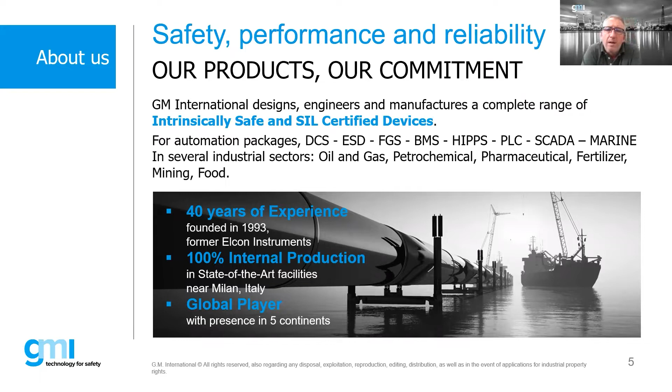We do everything here in Italy, and of course, we are available worldwide with our commercial offices and with our support that we can provide worldwide. As said, we are in Italy. The main company, the production side, is in Italy, but we are available almost all over the world with our subsidiaries or with our partners, whether they are agents or distributors.

Yeah, of course, as said, we do everything here in Italy. We have state-of-the-art technology. One important step, which I would like to highlight, is that we test everything 100% before something leaves the factory. And that's why we are so confident about the quality of our product, that we deliver our product with 5 years warranty. Let's go ahead.

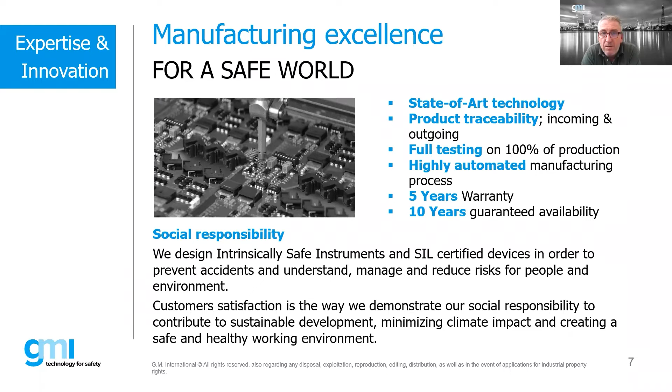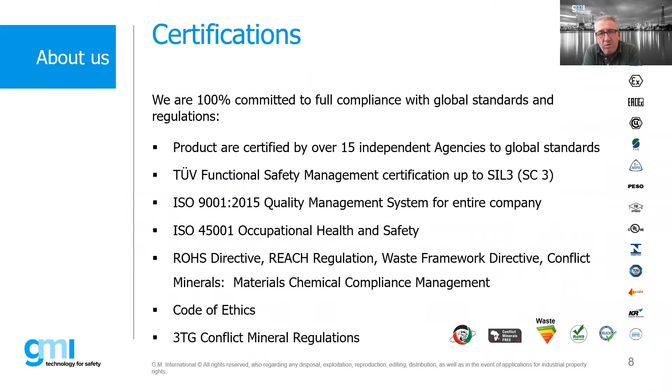Yeah, as said, the quality is one of the most important topics, since we deal with safety, whether it is intrinsic safety or functional safety. We are in somehow responsible to protect human life, to protect the assets of a company as well as the environment. That's why we hold several kinds of certificates, including all the necessary certificates which are demanded, which are requested locally. So you can see here a lot of certificates starting from the CE, mainly for Europe, as well as UL, FM for United States, and we have certification for the UAE, for India, for Brazil, and so on and so on. So I would say almost all countries are covered.

Here in one page, we just show our portfolio, our range of products, which is ranging from IS barriers to loop indicators. Last bullet, and it is including safety relays, isolators, power supply systems, and so on and so on. All of these items, let me say, cover either the intrinsic safe aspect, or the functional safety aspect, or both of them.

So you can find intrinsic safe barriers which are SIL 3, suitable for SIL 3 applications, for example. Last bullet, I want to show our expertise.

Our expertise in intrinsic safety, SIL, and functional safety - that's in fact what we provide as a service: consultancies to our customers, webinars, or even training, which would provide a formal certificate to the participant.

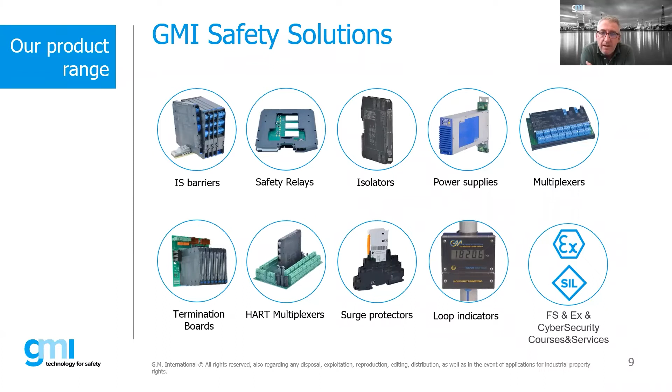And yes, I think this was as promised, I was short. This was my last slide before handing the conversation to Bob and entering into the detail - I missed to mention, today's webinar title is Fundamentals of Intrinsic Safety.

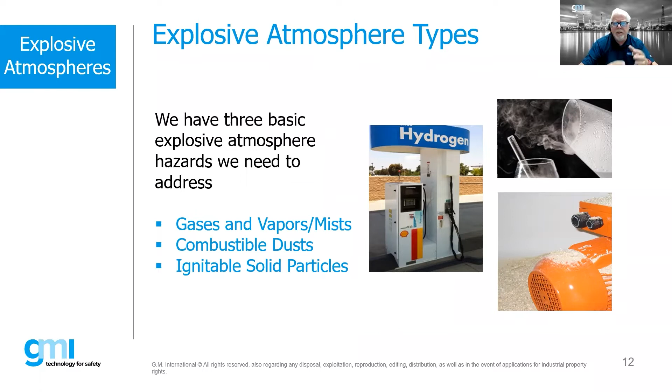Those 60079 documents are the foundation for the EN standards, the AS/NZS standards, and the UL standards, which have adopted 60079, as well as other country-specific standards. So again, a little bit about explosive atmosphere types.

Flammable and combustible liquids can produce gases or vapors, which are also combustible. These gases can be easily ignitable and are very dangerous, given that they can spread quickly and widely. I just literally saw a video this morning that was published as a report from the National Transportation Safety Board here in the United States on a pipeline explosion from 2019.

The video is very hair-raising. Unfortunately, one person passed away from the explosion. But these types of explosions take place almost on a daily basis, unfortunately. But we somewhat get immune to it because there are so many other worldwide events going on.

So we sometimes just say, oh, it happens, but it does happen significantly, and it happens almost on a daily basis. So we need to make sure that we think about this in our own particular projects, jobs, and responsibilities, to keep this in the back of our mind.

Any flammable liquid at or above its flash point will give off a combustible vapor. The flash point is that temperature at which a liquid becomes a vapor, if you will. That's different from ignition temperature. Flash point is the point at which it will give off enough ignitable vapor to ignite. Because flammable liquids in and of themselves are not necessarily the issue. It's when they start emitting vapor in combination with air that we have problems.

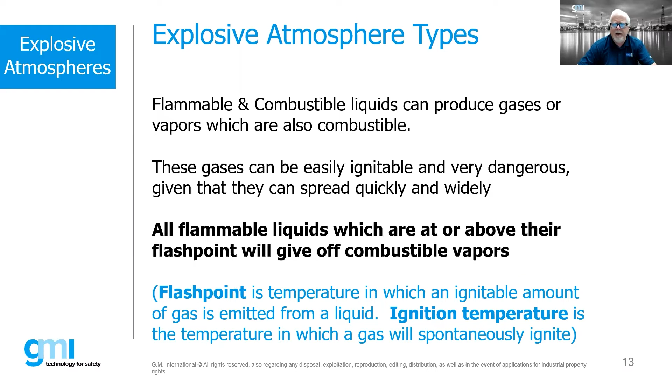So combustible dust, where do we find those? They could be metal dust, carbonaceous dust, coal mines, coal, carbon black. But we could find these types of carbonaceous dust in refineries as well. Coker units within a refinery are very much a dust hazard. And again, as I mentioned, flour, grain, wood, plastic, and chemicals are different types of combustible dust.

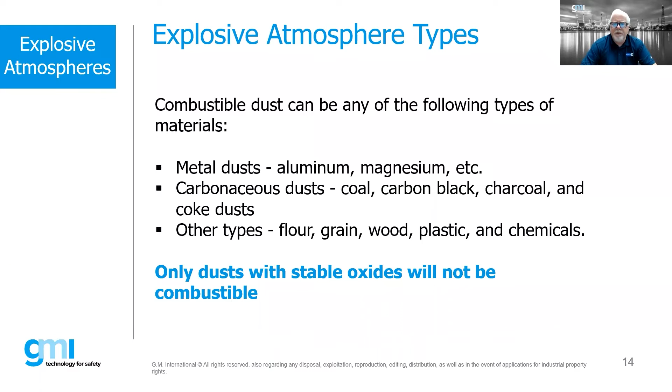So only dust with stable oxides will not be combustible. Keep that in mind.

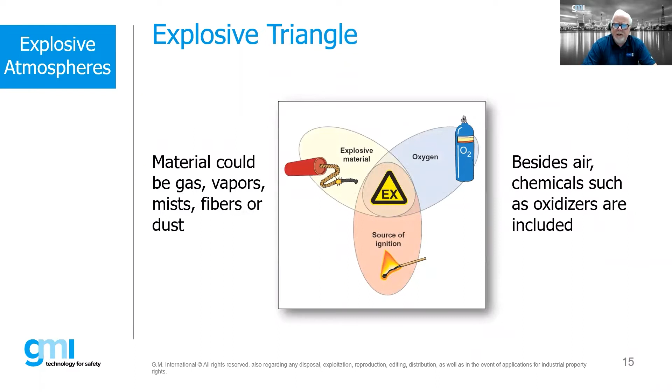So when we talk about an explosion and the fundamentals of EX, in order to have an explosion, we need three legs of a triangle. We've all seen this in some way, shape, or form: a combination of a source of ignition, an explosive material, and oxygen or air. When any one of those three legs is missing, then we've addressed it in some way. But if all three legs are present, that's usually when we'll have an explosion under the right conditions. So the whole idea of EX protection is to try to eliminate, reduce, or mitigate one or more legs of this triangle.

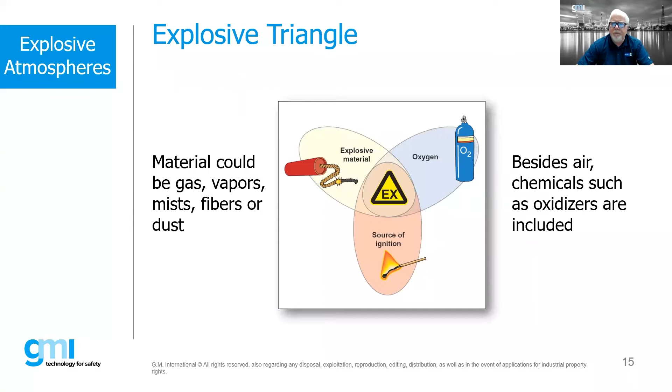So the question that usually comes up is, when we think about sources of ignition, with intrinsic safety like a GMI barrier, the whole concept is keeping that source of ignition below the minimum ignition curves of the flammable gas air mixture. So the way that we use IS, in effect, is eliminating that source of ignition.

But when we talk about other protection concepts, that's when we start looking at different methodologies to protect. Usually the question also comes up, people think about sources of ignition generally as electrical equipment. I'm in the electrical business, that's where I grew up, so I've always thought about things like electrical arcing and sparking. However, in reality, in many cases, a lot of these major industrial accidents are actually caused by other sources of ignition, such as hot surfaces.

Exhaust systems that you find—the BP Texas City explosion took place because of a diesel exhaust system on a pickup truck that was located near a cracking unit, which ignited the flammable gas. So that was a hot surface.

Open flames, obviously, cigarette lighters, pilot lights, cutting torches, things like that. That's why we have safe work permits for using these types of equipment in hazardous locations, or we may require gas-free certification.

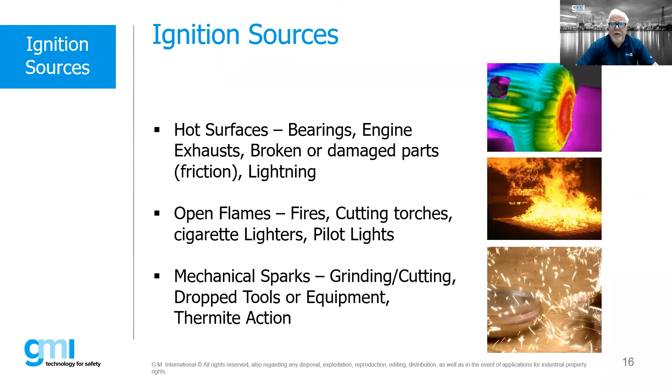Other things like mechanical sparks from cutting or grinding. People don't realize that certain tools, when we take certain metals and drop them or rub them against another type of metal, can generate enough energy to create a spark. If we look at videos or movies of old times where people are forging swords, taking an anvil and banging on it, we're creating mechanical sparks. Hopefully not doing that in a flammable atmosphere.

Stray electrical currents, electrical faults, are certainly one of the big issues we talk about. Another issue that doesn't always get thought about much is static electricity, the buildup of static electricity. This could come from conveyor systems, flowing liquids, air/steam leaks, agitators. All of these things can create static electricity, so we need to address that.

And now that we're talking about using radio frequency, everything from lasers to communication, we have to be concerned whether there's enough energy in the radio frequency to ignite a flammable gas air mixture.

Some of the other things: batteries, ionizing radiation, ultrasonics, exothermic reactions.

We all can probably remember the massive explosion that took place in Beirut, where ammonium nitrate was stored in a warehouse down near the port. That was, in effect, an exothermic reaction that took place with the ammonium nitrate being stored next to fireworks that actually started to go off. The fire in and of itself wasn't enough to ignite that ammonium nitrate, but the buildup of heat in a confined space ultimately resulted in a terrible event.

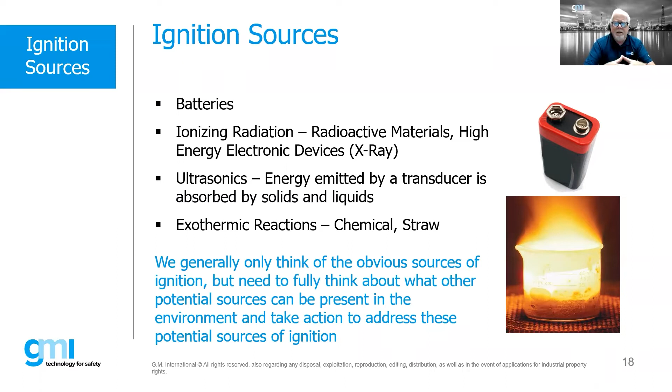So again, we need to think about some of these other sources of ignition. When we're in our facilities, looking at equipment, don't just think about the obvious things—look at some of the things that are maybe not so obvious. Or if you're working in a facility and they say you cannot take this particular piece of equipment into a hazardous area, like your iPhone, a key fob, or even a flashlight torch, there's a reasoning behind that. It's because all of those devices potentially could be sources of ignition.

So with gases and vapors, all of them have different ignition temperatures, and we categorize these in different groups. Using some of the most popular gases and vapors we'll see in industry, things like hydrogen—you'll notice that hydrogen has a very, very high ignition temperature, about 560 degrees C. So it takes a lot of temperature to ignite hydrogen.

And you see other gases generally quite a bit significantly less, right? Hydrogen sulfide, for example, only takes 270 degrees in order to spontaneously ignite. So you would think that hydrogen sulfide is actually a much more dangerous gas than hydrogen.

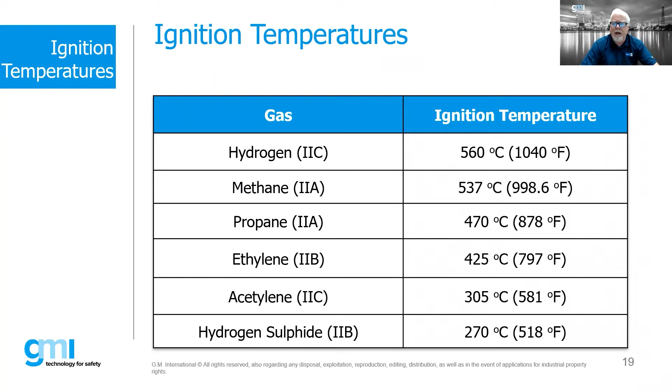Well, gas grouping is only one factor in which we want to categorize these gases, and it's also based upon some other factors. The other factor we take into account with regards to gas grouping is actually the ignition energy—this is how much energy it would actually take to ignite these gases and vapors.

So thank goodness you're not walking in a hydrogen environment. This is one of the things, when everybody's talking about using hydrogen as the fuel of the future, that people need to remember: because hydrogen doesn't take an awful lot of energy to ignite, we have to be extremely careful about it.

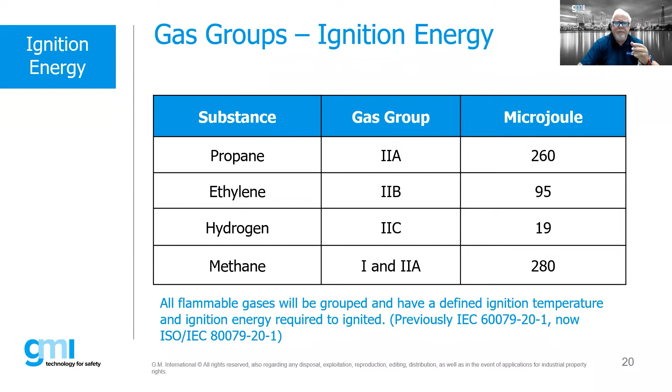The other thing about gases and vapors in particular that we have to take into consideration from an Ex perspective, as I mentioned, is the minimum ignition energy. We just mentioned that hydrogen doesn't take an awful lot of energy. But there's also what is called the lower explosive limit and the upper explosive limit, or flammable limit.

Most gases and vapors have that LEL, UEL of somewhere between 2 and 15%—that's generally the sweet spot. But hydrogen, if you notice, actually has a lower flammable limit of somewhere around 4% to about 76 or 77%, meaning that any time we release hydrogen into the atmosphere and combine it with air or oxygen, if it's within that ratio, and we have 19 microjoules going off in some way, shape, or form, we're going to have an explosion. So this is one reason why we treat hydrogen slightly different than some of the other flammable gases and vapors in industry.

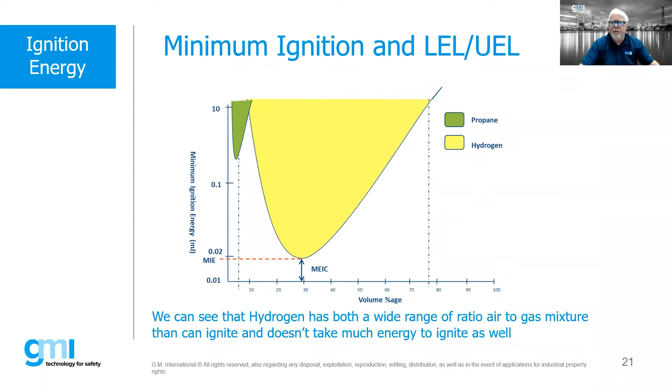So let's see this. Is it a poll? I think so. Oh yes, let me share the question. We are going to check whether we are getting the full attention of the participants - see if you were paying attention in the first part.

By the way, there was a question raised about zone division mapping, so we'll talk a little bit about that at the end because it's a good question. And speaking of which, the zone concept we're going to talk about is primarily an international concept. Here in the United States, we actually have two concepts - division and zones - and we'll talk a little bit about that at the end.

Okay, I stopped the poll and I'll share the results, and I'm asking you to comment.

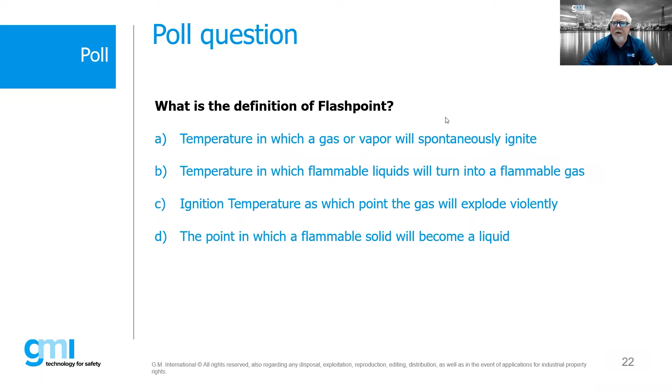Another factor we have to take into account from electrical and mechanical equipment is the T class, and this is temperature classifications. So every flammable gas and vapor out there, we assign a T class to it. If we see a gas that's a T1 gas, that means the ignition temperature of that gas is above 450 degrees C. If it's a T2 gas, it's somewhere between 450 and above 300, and so forth and so on.

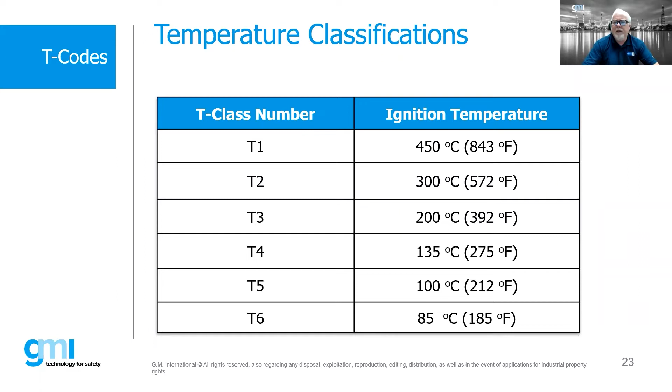So here's just showing some of those gases and vapors we talk about. Notice hydrogen - I had mentioned this earlier - hydrogen has a very, very high ignition temperature, so we consider that a T1 gas. Some of the other gases range anywhere from T2, T3, to T6. There's only really one gas I'm familiar with that is a T6 gas, and it's carbon disulfide, and it has an ignition temperature of 90 degrees C, which is very, very, very low. So we really need to be careful with carbon disulfide.

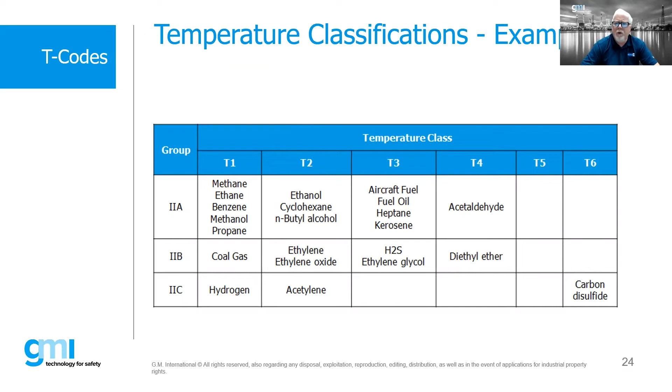Most of your flammable gases and vapors will have an ignition temperature of somewhere between T3, T2, and T1. That's generally about 98% of the gases and vapors in industry that are T3 or hotter. So as a generality, when we start looking at electrical equipment to place in this area, if we can find electrical equipment that's rated T3 or better, generally they'll be good for almost all applications.

So this chart can be a little bit confusing, and I'll try to explain it a bit. But basically, when we're selecting electrical or mechanical equipment from a T code perspective, what we're trying to do is find a product that will have a T code that corresponds to or is better than the T code of the environment in which we're placing it.

So we know that from a testing perspective. We tested it, we put it in its maximum ambient. There we go, we have a number.

A T4 gas is actually a gas that will have an ignition temperature above 135 degrees C, and it would be something below 200 degrees C, because if it was 200 degrees C or above, it would be a T3 gas. So a T4 gas could have an ignition temperature of, say, 140 degrees C. A T4 product could have a maximum relevant surface temperature of 120 degrees C. So from a temperature standpoint, a T4 product is suitable for a T4 or higher environment, meaning that in a nutshell, a T4 product can be used in an environment in which we require T4, T3, T2, or T1.

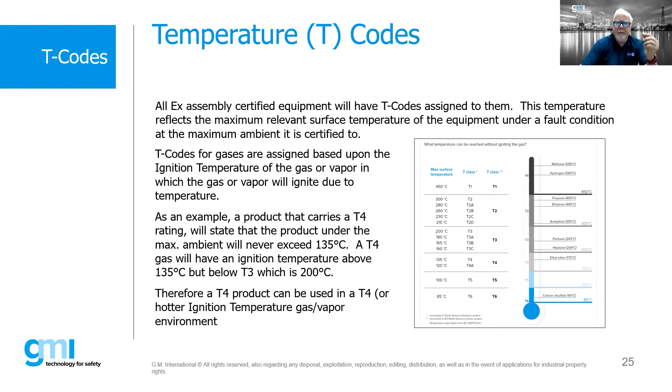One of the reasons why acetylene is difficult to deal with is that if we have a release of acetylene into the environment, it will basically go everywhere. It won't go up to the ceiling, it won't just get dispersed, it'll go all over the place. Gasoline vapors, generally our most flammable environment is right around our feet. So when we're fueling up a vehicle, people seem to think that vapors are actually going up, but they're actually going up and then dropping down. So the most flammable environment is actually around our feet when we're at a fueling station.

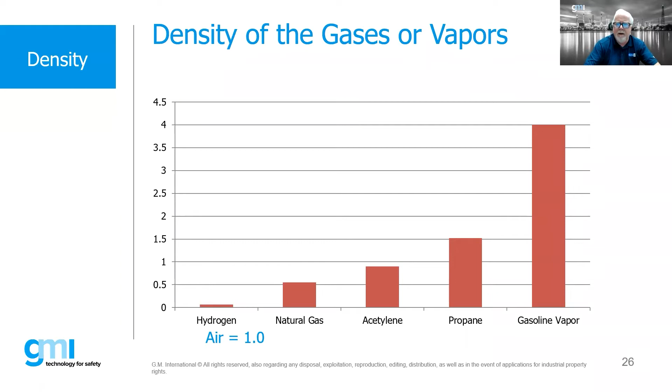So when we're selecting, say, something to determine where the sources of release are, where are the sources of release that we normally would find in hazardous areas? Typically piping. Anywhere we've got a valve of some sort where we're bringing two pieces of pipe together, that's a potential source of release. That's an area in which a gas or vapor could escape under certain circumstances.

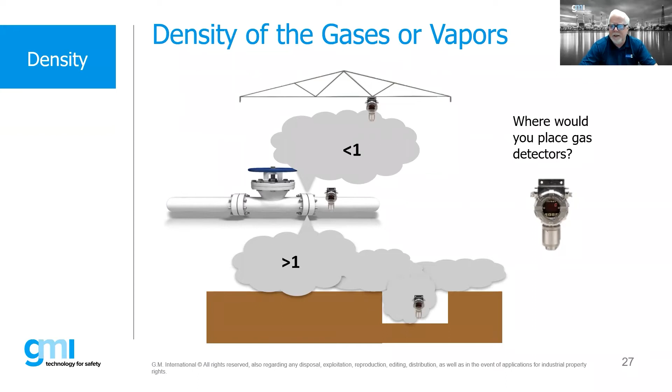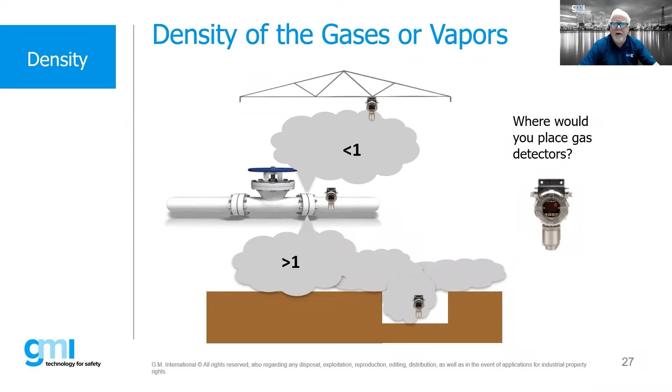So using this scenario, where would we place the gas detectors? If the gas detectors were in an environment where the gas was heavier than air, we'd want to put the gas detectors down near the floor. Obviously, in a situation where the gas was lighter than air, we mount our gas detectors near the ceiling. If it's an environment where acetylene is located or something like that, we would probably have our gas detectors located in a particular area that reflects the density of the gas. So there's some little things we want to do when we're designing our systems around EX to make sure we're taking into account the density, T codes, ignition temperature, and all that good stuff.

So we have another poll question. Let me share the question so that people can respond. This is going to be tough because I didn't cover all the T codes, but I did give you a hint, and I will give you a hint: T4 is 135 degrees C.

So the question really is, again, what would be the T code for a product that has a maximum relevant surface temperature under normal or fault conditions of 125 degrees C?

So I'll give you some more hints here. T6 is 85 degrees C. T5 is 100 degrees C. T4, as I mentioned, is 135 degrees C. T3 is 200 degrees C, and T2 is 300 degrees C. So if that helps you a little bit.

Very good, we have a good response rate. So let's wait for just a few more clicks, and then we can stop the poll and I'll share the results for further comments.

Continuing on, a little bit about area classification. The 60079 standards, part 10-1 deals with gases and vapors, 10-2 deals with dust. We also have other documents, like the Energy Institute IP15, which is a wonderful document for area classification. Here in the United States, we have API recommended practices, and there's also an NFPA document. There are other area classification documents out there, but these are what we use to determine whether or not an area is hazardous or non-hazardous.

Once it is hazardous, we need to determine what type of hazard it is. Is it a gas? Is it a dust? And how prevalent this gas or dust could be in that environment. This is where we get into either zone 0, zone 1, or zone 2.

A zone 0 environment is one in which a flammable gas-air mixture could be present continuously or for long periods of time. A zone 1 environment is an area in which flammable mixtures can be present during normal operation. Zone 2 is where it can be an explosive atmosphere, but if it does, it's for very short periods of time.

Talking about division and zone mapping, under the US system, the division concept incorporates both zone 0 and zone 1 as division 1 for the most part. Division 2 is basically the equivalent of zone 2 environments.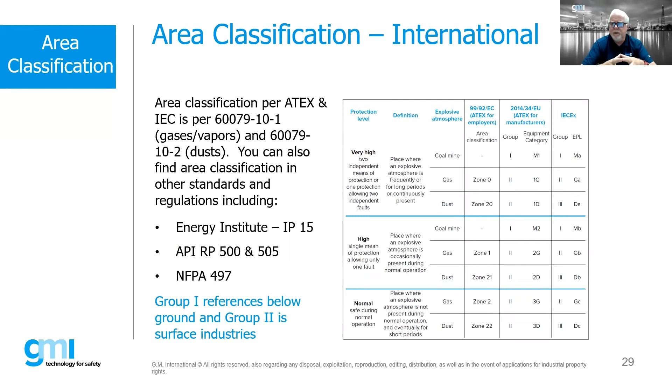There's category designation that I won't spend a lot of time on, but under the ATEX directive, we put down categories. For example, if we had a zone 0 environment, that's equipment category 1G. Zone 0 is considered to be a 1G equipment category. Under the IECEx requirements, we call that GA, for equipment protection level. So 1G and GA basically mean one and the same. This is the IECEx designation, and this is the designation under the ATEX directive.

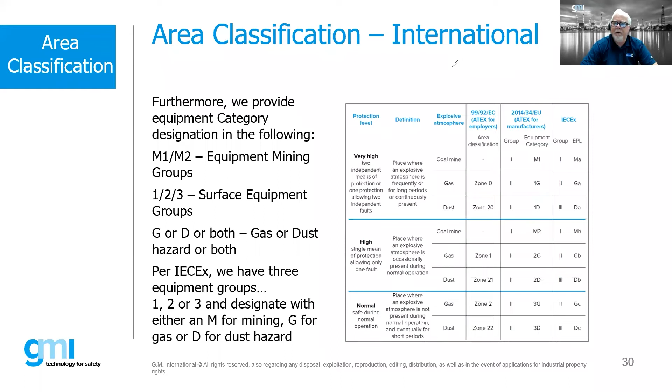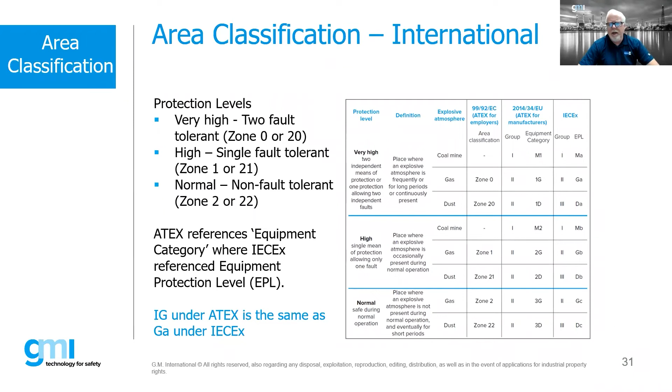This is important when we talk about protection concepts of fault tolerance. For products that we can put into a zone 0, we demand that these products must have two-fault tolerance. When you look at, for example, a GMI intrinsically safe barrier, you'll notice there's three Zener diodes - there's actually redundancy built in within IS barriers, either a Zener or galvanically isolated barrier. So these have fault tolerance built in, meaning that if there's a failure, it'll fail in a fail-safe mode. Single fault tolerance products are suitable for zone 1. General industrial products that will not cause arcing or sparking but have no fault tolerance are suitable for zone 2. Again, this is the equipment category where the IECEx references equipment protection levels.

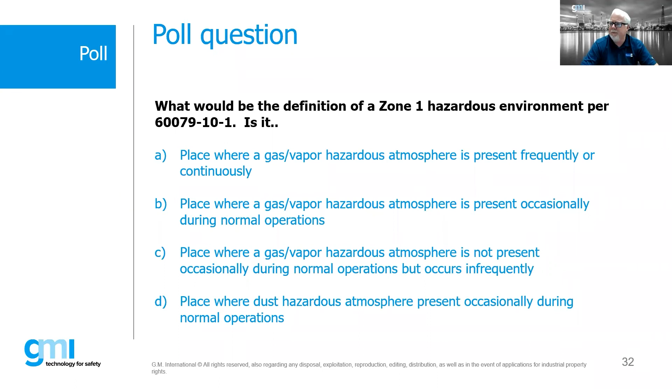Every piece of EX equipment that's built out there is going to follow one or more of these concepts built into that product. It's either going to be energy limiting, or we're going to consider it non-sparking, such as increased safety, or we're going to contain the explosion - flameproof is a good example - or separation, such as pressurization. All of them work in different fashions. They all work fine, they all have advantages and disadvantages, but that's really the key thing.

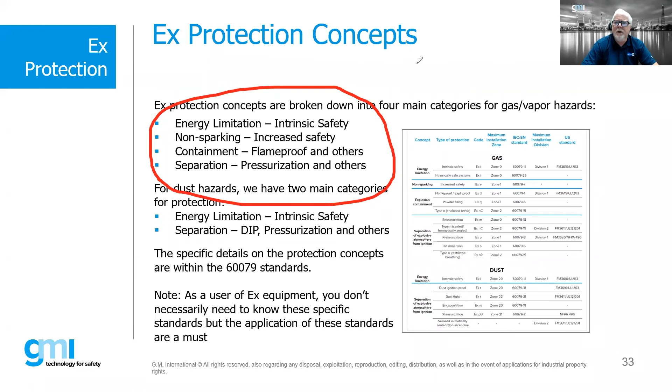So when we're talking about protection concepts and looking at products out in the field, we want to make sure that these concepts, once they're applied, are still operating and doing exactly what they should be doing.

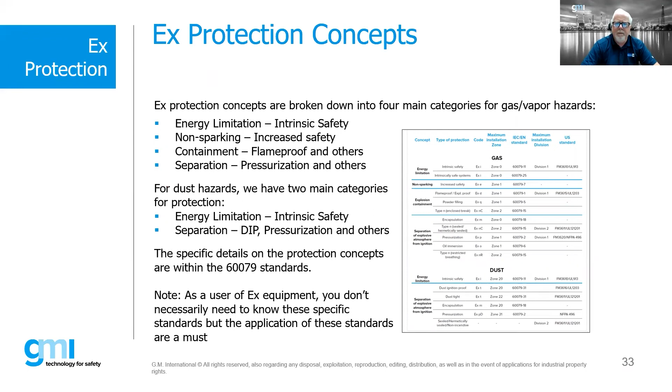So energy limitation - again what we're talking about here is primarily intrinsic safety. We're limiting the amount of energy below that minimum ignition energy for that particular gas group environment. And we divide these into different fault tolerances. So we'll have barriers suitable for IA, meaning suitable for output into a zone 0, IB, suitable for zone 1, or IC, suitable for zone 2. Most of your barriers that you'll find from manufacturers out there are actually rated EX IA - a vast majority of them are.

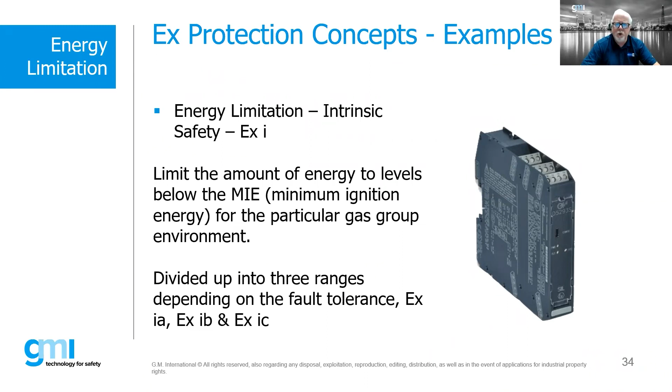Non-sparking - here we're taking products and basically saying, hey, there is no sparking going on here. How can we make sure that there's not going to be any sparking? So we build equipment in which there are very well-defined creepage and clearance distances between termination points.

So terminal blocks - if all we're doing is putting a bunch of connection points inside of a junction box, this is a prime example of increased safety. We can take this concept and put it into a zone 1 area because we're not concerned - there is no arcing or sparking going on. All we have to be concerned with really is the temperature code, how hot this product will get when placing it into a hazardous area. So it's a very effective way of dealing with hazardous locations.

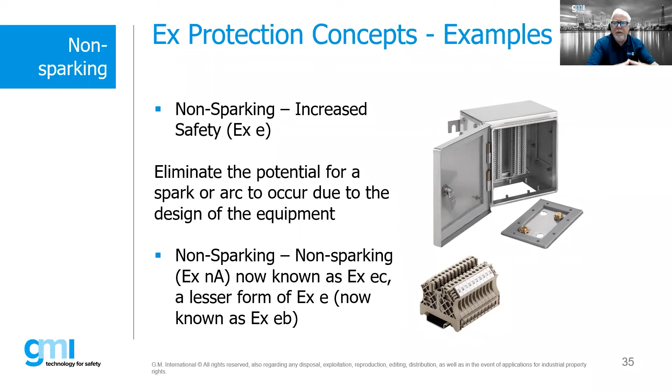This is called EXE. A secondary one used to be called EXNA, is now changed, and that's called EC. The old legacy one is now EB. So non-sparking is a prime example - increased safety.

Containment - this is the one where we talk about heavy cast flameproof type enclosures. So we're allowing a gas or vapor to get on the inside of these enclosures, and we're going to assume there's going to be electrical arcing and sparking equipment on the inside. And if we have that right combination of fuel-air mixture getting on the inside, we're going to have an explosion. That explosion should be contained.

We want to make sure all the bolts are nice and tight. We want to make sure the flame paths are nice and clean. We want to make sure all the holes are plugged up with suitable plugs. We want to make sure the cable glands going in there are suitable to contain that explosion. So that's how flameproof works - we have an explosion on the inside, making sure it cools that hot flaming gas to where it does not ignite the gas on the outside.

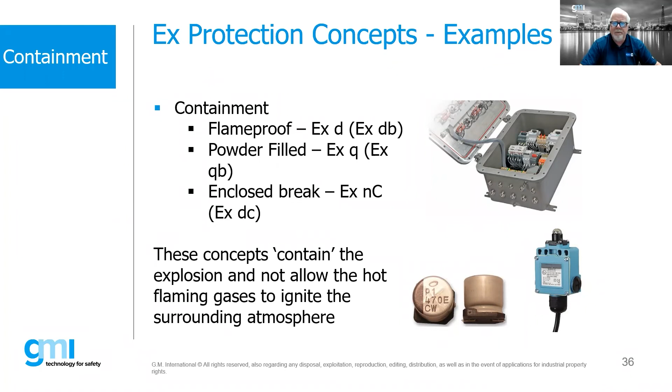There are other devices that are flameproof - you can actually go flameproof with really small devices in which they can be made out of plastic. So there are different devices you can actually use that are outside of the big heavy cast flameproof type products.

The other one is separation. So this is where we're pressurizing something, or encapsulating it, or hermetically sealing it, or oil immersing it, or even restricted breathing. These are all basically trying to keep any flammable gas-air mixtures from coming into contact with any potential arcing, sparking, or ignition capable equipment. As long as we can keep that flammable gas outside of our pressurized cabinet, a restricted breathing enclosure, or immerse it in oil, these are all ways of separating that fuel from coming into contact with the ignition source.

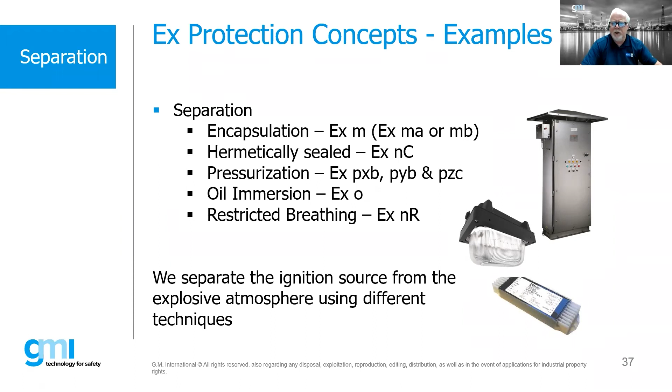Excuse me, Bob, but we have a couple of questions. Yeah.

It's better you read it, because maybe I lose something.

One of the questions was: for dust hazard environments, can we use flame-proof, explosion-proof devices? Yes. Explosion-proof equipment here in the United States is suitable for Class 1, Division 1. For explosion-proof applications, explosion-proof boxes are rated for both gas and dust hazards. EXD boxes that are flame-proof are almost always rated as suitable for dust hazards too. You always need to check with the manufacturer, but you'll see a marking string on a flame-proof box that shows EXTD - TD is the protection concept, meaning dust tight, and a flame-proof box is in effect dust tight.

Second question: there was a question on 316 stainless or brass cable glands - is there an advantage or disadvantage? We sell EX equipment, and most of the time, about 98% of the time, we don't sell a stainless steel version. Most people will not use stainless steel because generally speaking, stainless steel cable glands cost a factor of 4 over a brass cable gland. Meaning if a brass cable gland is $20 US, a stainless steel version is going to be about $80 to $90 US - a significant increase in price.

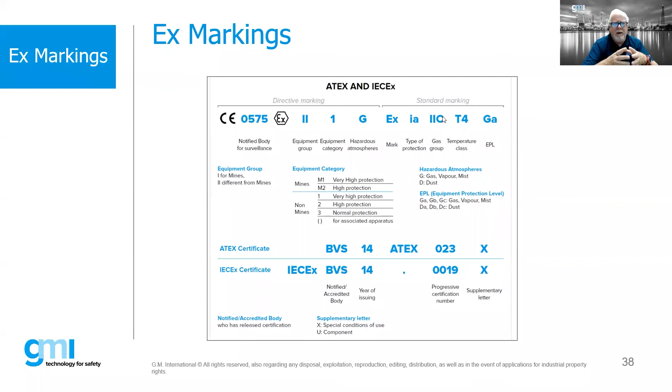Lastly, there was a question: what separation method can be used for Zone 1? Yes, it can. Separation, as I mentioned, includes things like pressurization. EXPX is a pressurized method suitable for Zone 1. PYB is also a pressurized method suitable for Zone 1. So yes, you can do separation using some of these protection concepts. Oil immersion is also suitable for Zone 1. So to answer your question, yes.

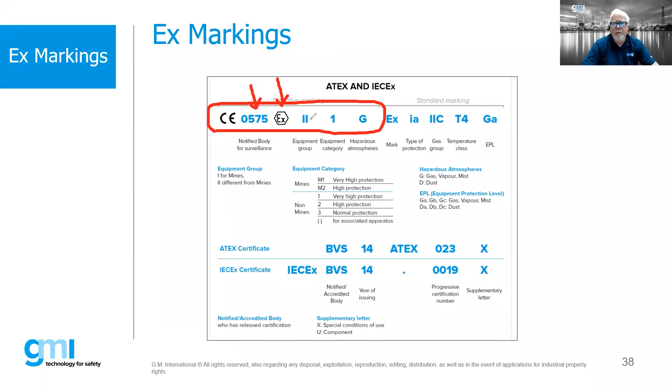Let's go through this quickly and show you the markings. This marking here is all to be in compliance with the ATEX directive - must have a CE mark. This number is the notified body. This is our EX hexagon, or epsilon. This tells us it's for surface industries, or equipment group. Roman numeral 2, and 1G tells us it's suitable for Zone 0. This marking string here is our protection concept string. In this case, it's an intrinsically safe device suitable for all gas groups with a temperature code of T4 or greater. This EPL is telling us, in another way, that it's also suitable for Zone 0.

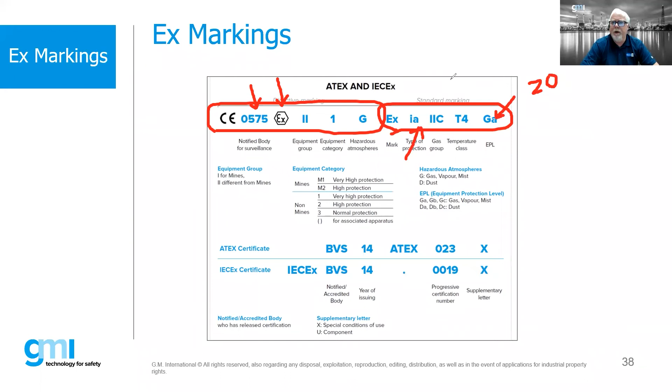This is not the marking for an intrinsically safe barrier - this is the marking for the device that would be attached to the intrinsically safe barrier. I'll give you an example of that in just a second. So that's typically your EX marking string.

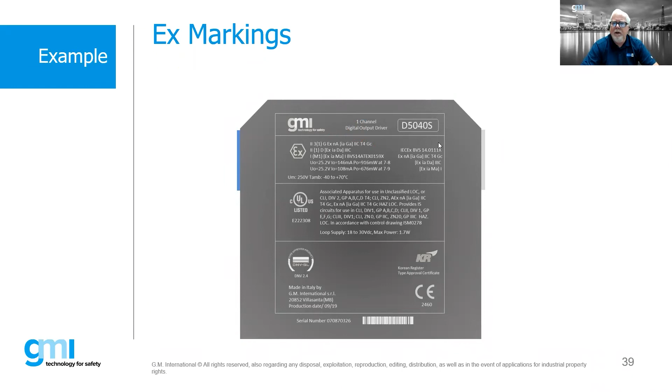That's where people get confused a little bit looking at all these marking strings on a barrier, and you'll see this kind of repeated - here's our dust requirements, here's mining requirements, and this is also other certifications for other world marks. So there's lots of different markings on this, and we really need to focus our attention on exactly which marking string we're trying to find.

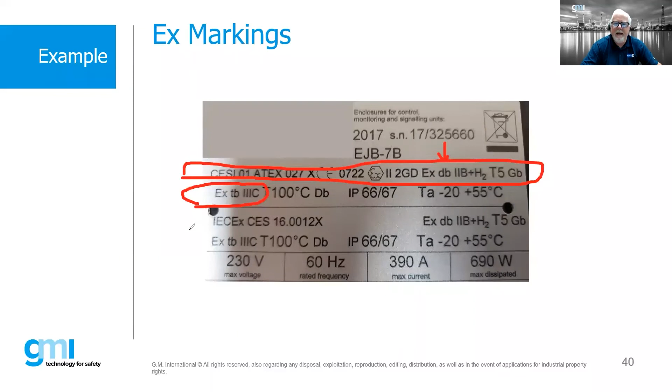So this is going into a flame-proof box. This is the marking string that you'll find. This particular box is certified under the ATEX directive, and there's your marking. This is the dust marking you will find, TB. So this product is both flame-proof, DB, as well as dust-tight, TB. It's good for dust hazards as well as gas hazards.

Then when we clear that, right below it is our IECEX marking string. Here's our certificate number. Notice that this marking string and this marking string are identical, and again we have the same information down here as up here. The marking string for dust is the same under the ATEX directive and the IECEX cert.

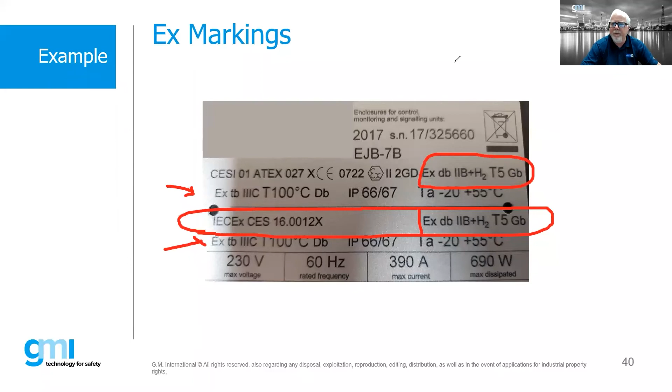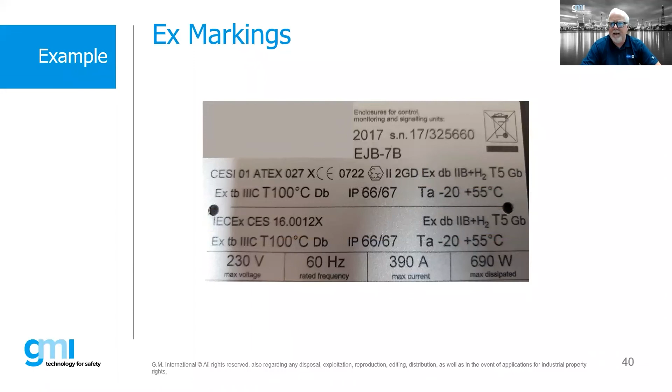So the important thing to remember is that when we look at labels, we really want to understand what these labels are. We've done webinars in the past on how to understand these labels more clearly. Unfortunately we're running out of time, but these last two slides are a good example - if you can go look at those and understand them, that makes life a lot easier.

So I hopefully just gave you a lot of hints there of what the correct answer should be. Still answers are coming slowly, but improving. Let's give them some more time, and I'll ask another question here.

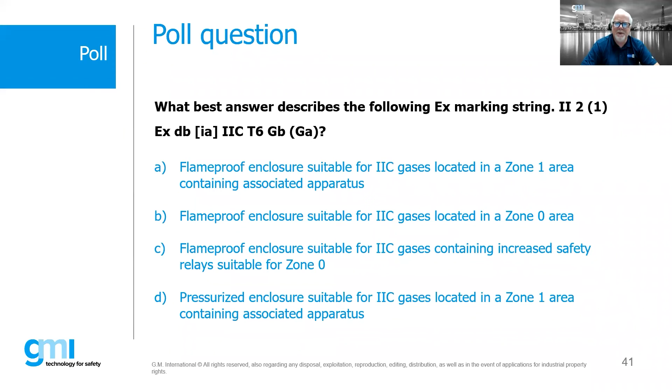This would be the marking on the overall enclosure. Okay, so there you go. If you can understand that marking string, that's - well, there are more onerous ones - but that's a pretty good one to have under your belt.

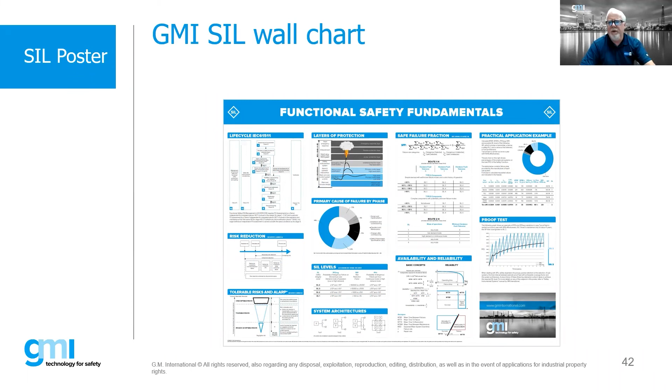So there is also an EX wall chart that GMI offers. We also have a functional safety wall chart. And by the way, this is actually from another presentation that I didn't correct, but remember this 60079 standard is really the key one. The 80079 standards apply to mechanical equipment. So if you're involved in any mechanical equipment for use in hazardous areas, you really want to focus your attention on the 80079 standards. If it's electrical, you want to focus your attention on the 60079 standards.

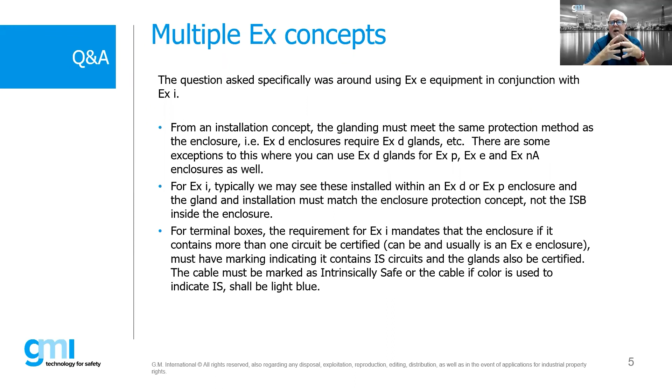This was a question that came up: what EX concept should I use specifically for a natural gas facility? And that's a tough question. But natural gas, as we kind of talked about briefly with LNG, it is primarily methane. It's a 2A T1 gas, and 2A is the least volatile of the three gases. T1 is a very high ignition temperature. So generally speaking, we can use almost any piece of EX equipment in a natural gas type facility.

But there are some generalities. Increased safety would be suggested, again, for terminal enclosures, or maybe combined with other protection concepts. Intrinsically safe certainly is a great protection concept, very safe, very cost effective, would make sense for a lot of your instrumentation circuits. You are limited with intrinsic safety, though - generally about 1 watt of power or less is really where you can use intrinsic safety.

Pressurization makes sense if we have, say, an analyzer shelter or a control building. Instead of making everything EX, we take the entire building and basically turn that into a pressurized building. That seems to make sense a lot of times. Flame-proof is certainly an option, but as we can see, it's usually heavy - lots of bolts, we have to maintain it. We want to make sure those flame paths are nice and clean.

So there's not necessarily one general protection concept that's always best for every application. But don't limit yourself to one protection concept. What I always tell engineers, and when I do engineering and design work, I look at all the different protection concepts to try to find the best solution from cost, maintenance, delivery, price - all of these factors should be part of your evaluation.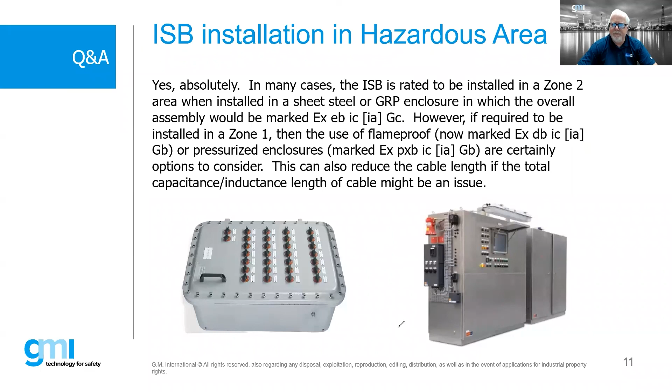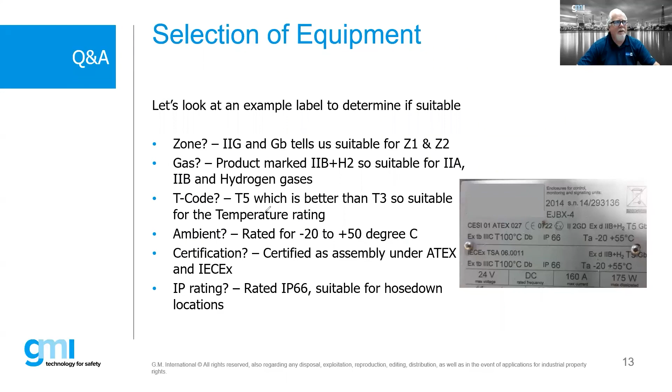Oh, got to clear my drawings. Close that. Here we go. I think we've covered this one already—selection of equipment, I think we already did this, so I know we're running late. So we'll turn this back over to you, Mauro.

Yes, thank you very much, Bob.